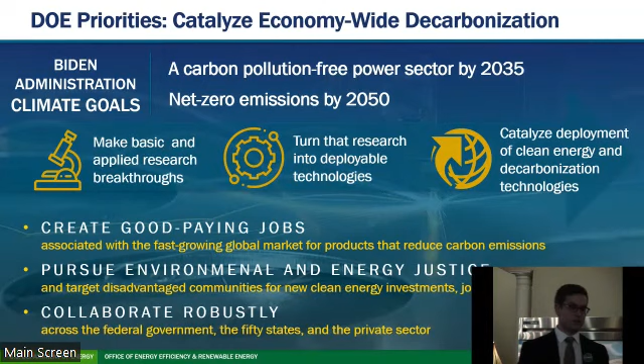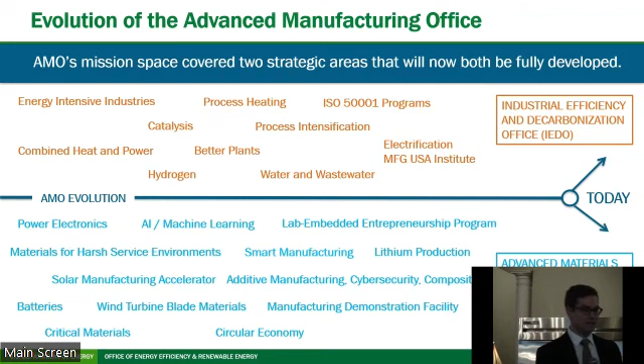Folks may or may not be familiar with the Advanced Manufacturing Office. If you're familiar with Better Plants, then the Advanced Manufacturing Office is where Better Plants lived for a long time. As of October last year, the Advanced Manufacturing Office took a hard look at the huge range of work we were doing and has evolved into now two offices. I'm here from the Industrial Efficiency and Decarbonization Office. Our sister office that split out of the Advanced Manufacturing Office is the Advanced Materials and Manufacturing Technologies Office, which looks at fundamental advancements in manufacturing to promote competitiveness of US manufacturers.

On the IEDO side, we're looking to increase energy efficiency in manufacturing, to drive energy productivity, to drive economic growth, and to promote decarbonization. Manufacturing is, of course, a major energy user, a major source of emissions in the United States and globally. So we invest in research and development efforts for technologies that will address those emissions and that energy use.

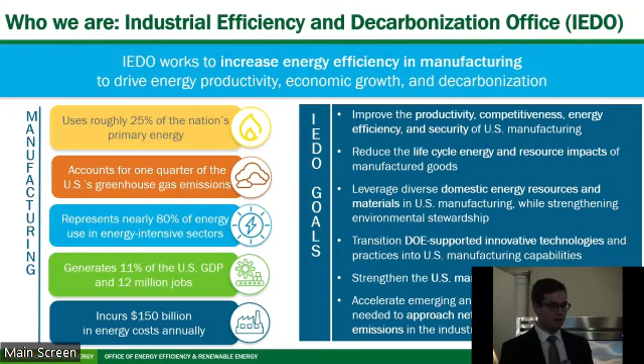I want to point to some of the things on the right here, some goals relevant to this pilot program we're working on: reducing life cycle energy and resource impacts of manufactured goods, providing training and strengthening the US manufacturing workforce, and accelerating the deployment of emerging transformative technologies that will reduce greenhouse gas emissions.

Within the program, there are several subprograms, several pillars. I'm going to touch a little bit later on the R&D efforts that our office works on. But this pilot program we're here to talk about today lives under the technical partnerships part of the office.

Technical partnerships works with partners in industry to help promote adoption of energy efficiency technologies and technologies that reduce greenhouse gas emissions. The main, maybe the banner program that you might be familiar with, is the Better Plants program.

The Industrial Assessment Center program, which is grayed out intentionally, lived within the Advanced Manufacturing Office for a long time. We still have strong connections there, but that has moved to a different part of the DOE organizational structure. We're always happy to help connect folks there.

It works primarily with small and medium-sized manufacturers. We also have the 50001 Ready program, which helps promote the 50001 standard, and CHP technical assistance partnerships. The tech assistance program really works on producing a lot of different tools and software that are provided to manufacturers free of charge to help them reduce their energy use and adopt best practices.

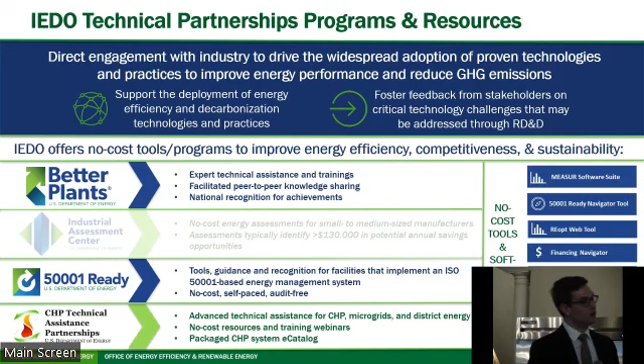Over the course of all of these programs, something we found is that the program has had trouble engaging with energy intensive industries. These are the parts of the manufacturing sector using the most energy and producing the most emissions, but we've had trouble engaging with them in existing programs like Better Plants. Going forward, we're really interested in understanding the challenges faced by energy intensive industries and helping them address those challenges.

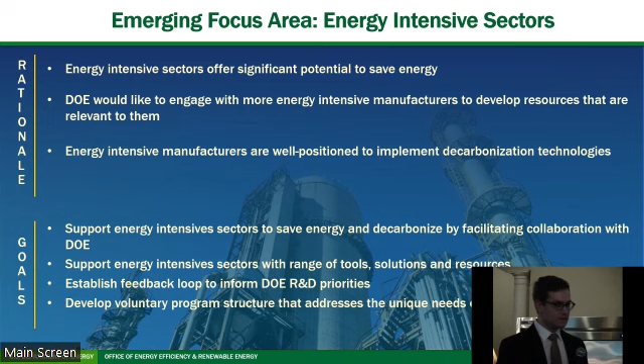So that is what this pilot is all about. We want to understand the technical assistance needs for energy intensive sectors and to find the right structure of a program that could meet those needs.

Starting out, what we've been looking at is working with a cohort of energy intensive manufacturers to work through ideas for what kind of support would be valuable. We have some initial ideas, but we're also open to new ideas, just trying to create this feedback loop to understand how we can be most helpful.

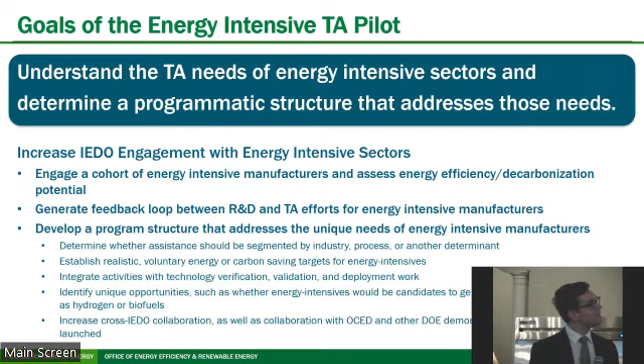So what I'm going to do now is hand it over to Senthil, and he's going to go through what kinds of programmatic offerings we have available now, to see if that catches anyone's eye.

Thank you, Zach. I don't think I need a mic, but I'm pretty loud, bear with me here. As Zach mentioned, this pilot initiative is all about you guys. We want to get your honest feedback, your honest opinion on what you think about these technical assistance offerings.

It's not just about giving you guys a questionnaire and getting your feedback, although we do have questionnaires, by the way, that we want you to fill out and give your honest opinion on. But it doesn't stop with that. We also want you to take advantage of our technical assistance activities, through which we want your honest feedback.

Our technical assistance activities include energy and decarbonization assessments. We try to put this into three buckets: energy and decarbonization assessments, comprehensive in-plant trainings on energy systems, and technology demonstration activities. I'm going to expand on these more in the coming slides.

But bottom line is we want to understand the ground reality of what some of the operational challenges are that you, as energy intensives, are facing from an energy efficiency and decarbonization perspective.

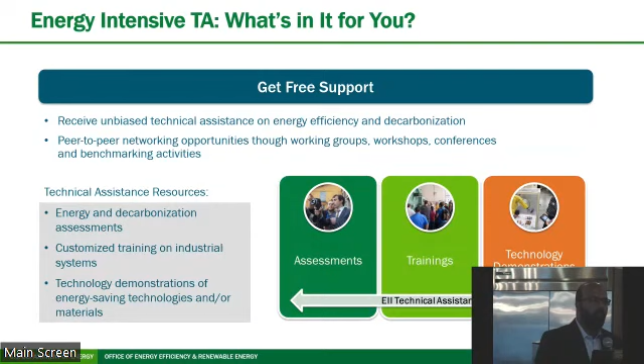There is no commitment or goal for this, it's completely voluntary. You receive, and we are not vendors trying to sell you anything. We provide you with unbiased technical assistance. So think of this more as a mutual agreement where we are trying to learn from each other.

As Zach mentioned, we have a flagship program that has been successful for the past 12, 13 years, which we call the Better Plants program. The Better Plants program has close to 270 plus manufacturing partners who work with us. But for some reason or the other, we were not able to attract the energy intensives to the program.

We do have quite a few energy intensives in the program, but we do not have the whole spectrum there. The reasons could be several, and that is what we want to understand.

It could be because the Better Plants program requires a commitment, and there is a goal of 25% reduction in energy intensity over a certain period of time. Maybe that is too ambitious for you guys. So that is what we are trying to understand - what would be the realistic goal? How much energy intensity can you guys really reduce, or what carbon reduction can you achieve over the years? That's what we want to understand.

We want you guys to take advantage of all the technical assistance activities, try it out. Let us know what works, what doesn't work, what makes sense, and which of these resources are more impactful for your cases. I have to tell you, we might not have all the solutions that you guys are looking for through these programs, and that is fine. That is what we are trying to get from this initiative or pilot period - we want to understand what more resources we can develop that are specifically focused for energy intensive industries.

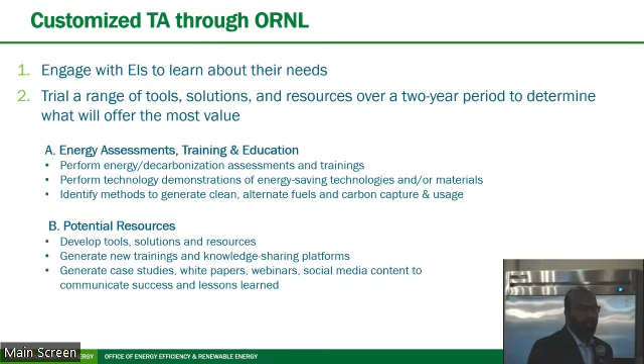You can request technical assistance through our website, which Zach will be sharing at the end. Depending on the type of technical assistance you ask for, we'll be deploying subject matter experts to your facilities. These SMEs have 30 plus years of experience in their particular field, so they can do industrial system assessments, compressed air assessments, process heating, steam system, and process cooling system assessments.

They can also do decarbonization assessments, focusing on alternative technologies and energy resources. And they can work with you on any process improvement or productivity enhancement assessments.

Lastly, for CHP, we have a technical assistance partnership with the CHP TAPs. Right now they are expanding to have much more capability than just CHP - they're now calling themselves on-site generation assistants, which includes fuel cells, on-site storage, and stuff like that. So they can help you do a feasibility study on whether CHP or any on-site generation technology works for your facilities, and they can also provide engineering support.

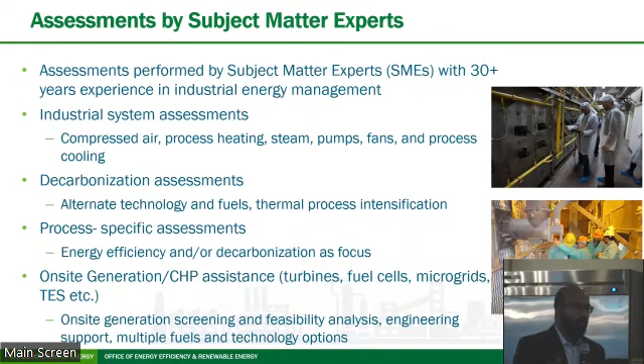Our subject matter experts are equipped with not only doing energy assessments, but also non-energy assessments, focusing on water efficiency improvement and waste reduction activities. And not only that, they are also equipped to do a plant-wide assessment.

Say if you do not want to just focus on one particular system, but you want to look at all the systems - as Zach mentioned, we have a partnership with industrial assessment centers who can do plant-wide assessments, who can look at multiple systems in your facilities and come up with opportunities.

They do have limitations - the IACs are equipped to do audits only for small and medium-sized facilities. So if you guys have any small and medium-sized facilities, you can take advantage of these assessments. These IAC centers are located out of universities, which are strategically located across the US.

Nice thing about this is, this year they have the capability to provide implementation grants - they have access to implementation grants. So let's say if they come into your facility and do an energy audit and give you a bunch of recommendations, and if you implement those recommendations, you can take advantage of the grants that are available through the program.

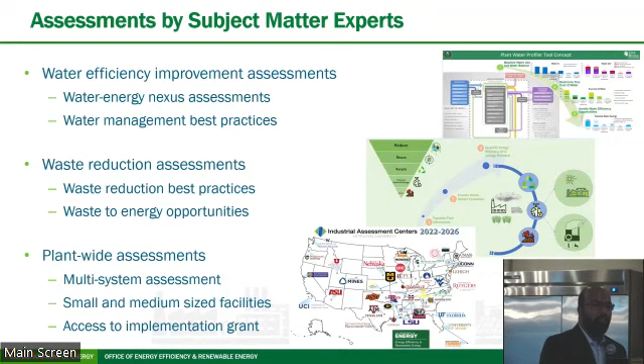Over the years, we have developed a bunch of tools - so many tools, and if I start talking about all of them, you'll be bored to death. But some of the important tools here is obviously the energy system optimization tool, which we call MEASUR, the Manufacturing Energy Assessment Software for Utility Reduction, which is a one-stop shop for energy system optimization. It has inbuilt modules - compressed air module, motor systems, fans, process heating, steam, you name it, we have everything there. And it has more than 60 plus calculators to do what-if analysis.

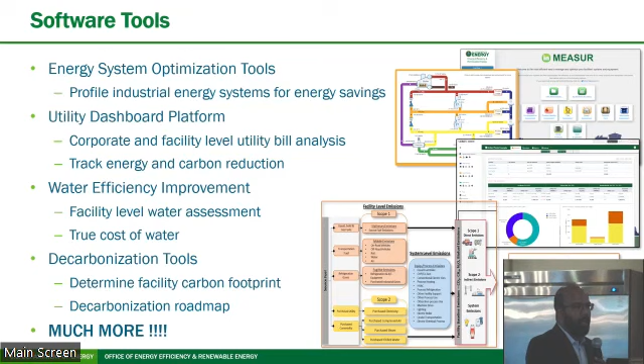And quantify your energy and carbon reductions. We have a utility dashboard platform that takes your utility bills and comes up with opportunities for cost reduction and water efficiency tools. Decarbonization is taking a front seat these days, so we're developing a lot of decarbonization tools that can quantify your scope 1 and 2 emissions and help you develop a roadmap for future years. We have a lot more tools available, and Zach will flash a QR code at the end that takes you through the website where you can look at all the other tools we have.

From a workforce development perspective, as participants in this pilot initiative, you'll have an opportunity to host in-plant trainings. These are a nice way to train your workforce, because we deploy a subject matter expert to your facility who spends 2-3 days training your plant personnel.

You can invite multiple personnel from different facilities to one facility and have a subject matter expert walk them through an assessment, show how to do it, use the diagnostic equipment, and how to use some of these software tools to quantify energy and carbon reduction opportunities. Some of the in-plant training topics we've done over the years include energy systems, compressed air, motors, process heating, steam, industrial refrigeration, water efficiency, and strategic energy management.

The other workforce development activity we have is a treasure hunt. We can facilitate these, the only difference being the facility personnel do most of the heavy lifting, right? We're there just to facilitate. They have a cross-functional team brainstorming ideas, the facility personnel split into groups, go look into opportunities, and then we help them use the instruments and quantify some of the opportunities they've identified during the walkthroughs.

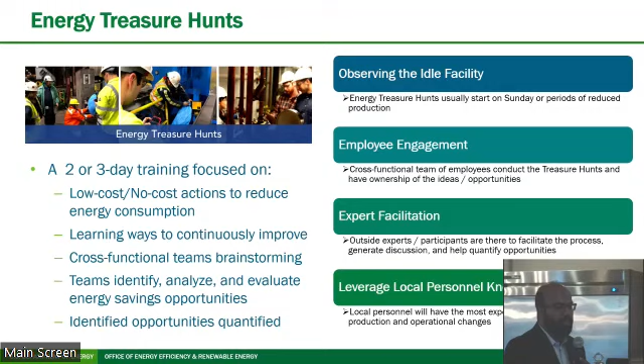The last piece is that DOE has almost 17 national labs across the US, so every year we host a technology day at each one of these labs. You get an opportunity to tour the state-of-the-art facilities and also get a first-hand demonstration of new and emerging technologies from industry experts and vendors who showcase their products, like carbon capture or electrification, and so on.

And obviously the last piece is supporting more R&D efforts, collaborating with DOE for more research, development, and demonstration. Zach will talk more on that.

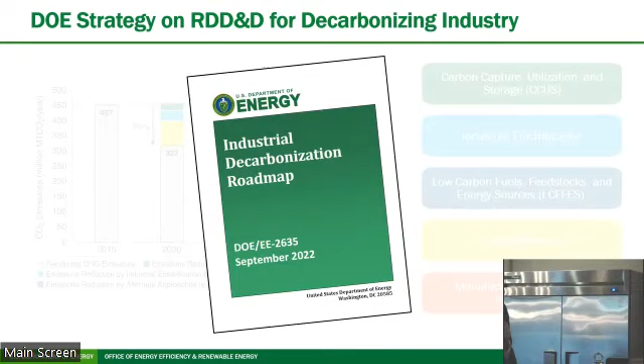I think I'll hand it over to Zach. Thank you. Yeah, so before we wrap up, I'm just going to very quickly touch on some of the R&D work happening at DOE and in IEDO specifically, because that's a huge thrust of what our office does and might be of interest to folks.

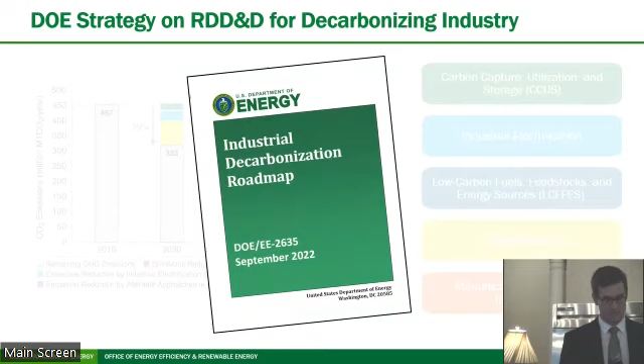DOE's strategy on energy efficiency and decarbonization of industry is outlined by the industrial decarbonization roadmap published last year. We think about our approach to decarbonization through several pillars: carbon capture, utilization and storage; electrification technologies; the adoption of low carbon fuels, feedstocks, and energy sources; energy efficiency measures; and fundamental manufacturing technology innovations.

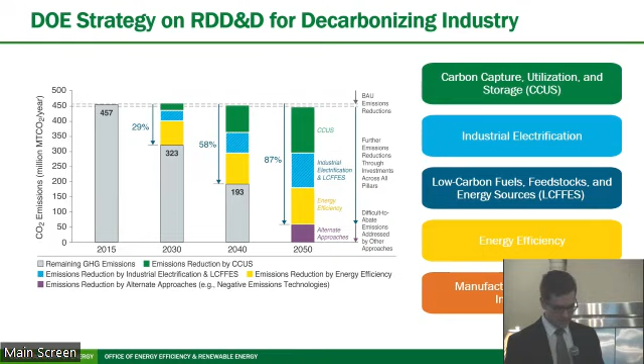At IEDO, we work in the space of research and development and pilot scale demonstrations, kind of first-of-a-kind demonstrations, and on the technical assistance end, and we work across all of those different pillars of decarbonization.

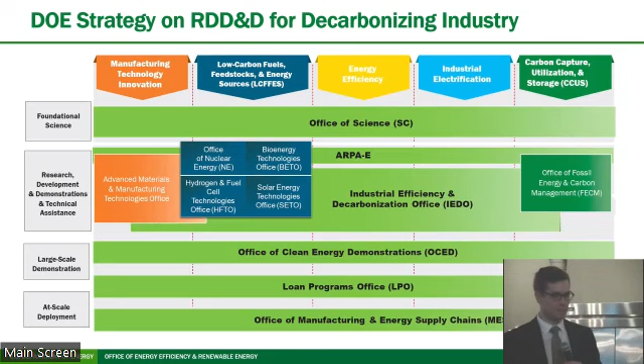We take a strategy in our office, both focused on specific subsectors and industries that are significant energy users, and also thinking about cross-sectoral approaches for equipment and other technologies that can apply in a number of industries.

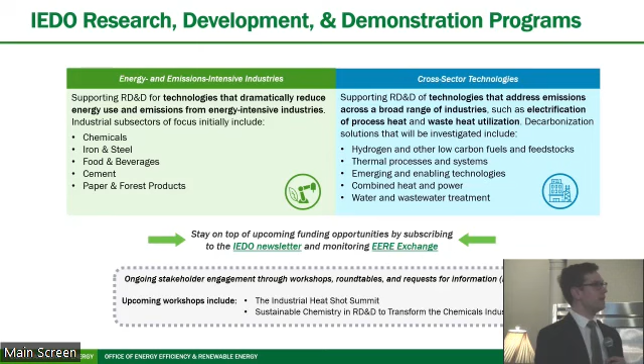So the big money news that's out there, when you get a copy of the slides you can click on those links, or go to our website to find out about them. We have the notice of intent linked there, but the full funding opportunity just got posted yesterday. IEDO has $156 million available for decarbonization and energy efficiency research in the industrial sector, and a $23 million announcement out for technical assistance partnerships.

And then in broader DOE, there's a very large funding opportunity available right now with the Office of Clean Energy Demonstrations. This is looking a little farther along in technology development and demonstration projects, again focused on the industrial sector. There's also tax credits available, which, I told someone earlier, I'm not a tax lawyer, so don't ask me specific questions about your taxes, but DOE is working on this.

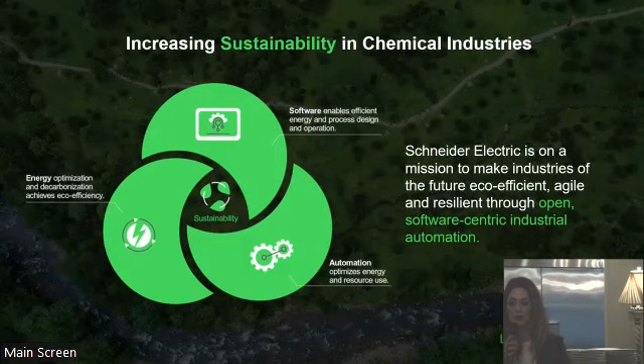Before we get into the decarbonization pathways and what we're doing at Schneider, we want to look at what's going on in the world. In the past few years, we've had the COVID-19 pandemic, the Ukraine and Russia war, disrupted supply chain issues, and an unpredictable economy. But one thing that remains constant is climate change.

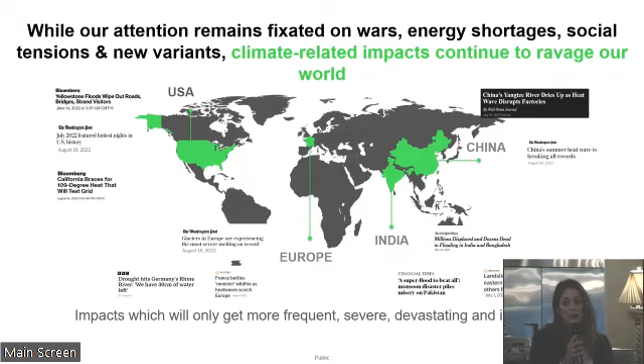We've had devastating events with flooding, droughts, hurricanes, and freezing temperatures in places that don't normally freeze. These events are really irreversible and devastating for people. So today we see a lot of pressure from stakeholders and from younger generations to decarbonize. But with the pressure high, we also understand there is a risk to access finance, and also risk to access talent. So how do we reach our net zero goals?

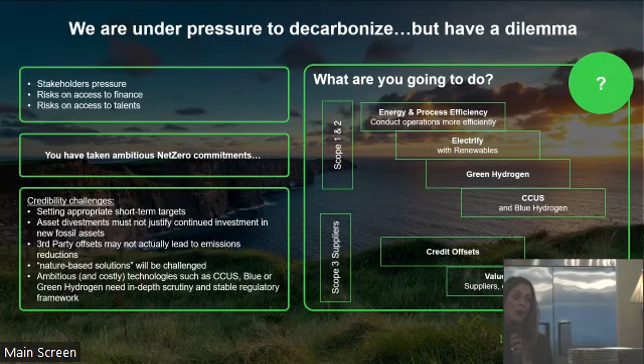We believe that you can reach your net zero goals by addressing low-hanging fruits — by that, I mean setting up short-term goals and long-term goals — and we need to continue to invest into technologies. When it comes to short-term goals, we can address decarbonization by 35%, lowering CO2 emissions just by applying our existing technologies. So that is really good news.

So we already have viable existing technologies that can reduce CO2 emissions by 35%. Some of the long-term goals, obviously, need a lot more investment and a lot more time. So we encourage our partners and customers to continue investing into the long-term goals. And as I mentioned, we need to continue to innovate and bring the technologies up to speed for producing green hydrogen, green ammonia, blue hydrogen, blue ammonia, or CCUS.

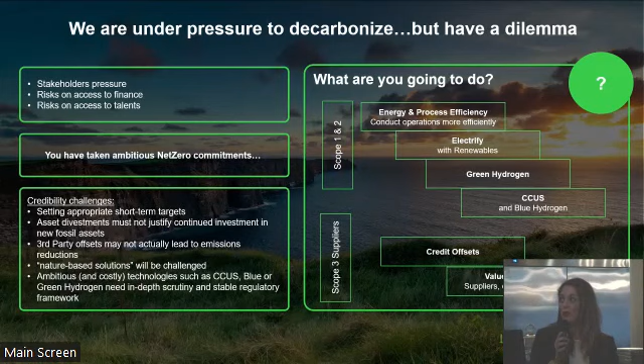So let's look at our numbers for CO2 emissions. These numbers are pretty high. These numbers came from 2021. 36.3 gigatons of CO2 emissions was a new record high in 2021 that came from the heavy industries. And we are on track, increasing our CO2 emissions by a 6% rate every year.

When it comes to heavy industries, 8.7 gigatons of CO2 emissions came from power generation. So when you think about the heavy industries and chemical industries, these companies really rely heavily on power and energy. It's one of the hardest industries to decarbonize because of their dependency on energy, and also because demand is very high, so they can't bring production down to address decarbonization. We have to run the plants and still find ways to decarbonize.

This is kind of shocking: 78% of the energy used in our industry is not electrified. This is actually really good news, because we have tremendous opportunity to electrify and use electrification as a way of decarbonization. Right now, about 80% of the energy in the industries is fuel-based. So really good news and opportunity to improve here.

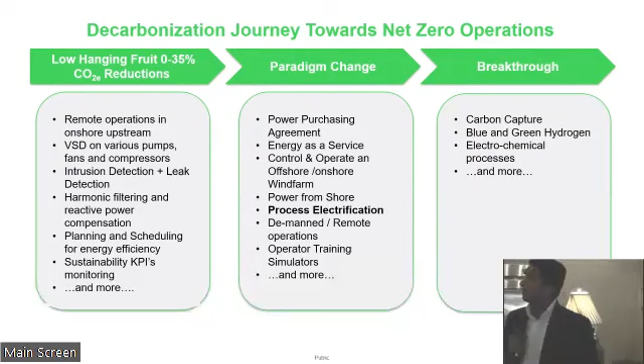When it comes to decarbonization, I'm of the view that all options are on the table. I'm not saying electrification is the only way to decarbonize. All options are on the table. Yasmin mentioned the low-hanging fruits.

If I look at the decarbonization roadmap, I will put that into three buckets maybe. The first one is the low-hanging fruits. These are the things which we can easily do in our plants, in our facilities with existing technologies, and can be done cheaper most of the times.

If you look at some of the things here, harmonic filtering is something we don't pay attention to most of the times, and also VFDs. There are many facilities still running with simple motor control systems, not with a VFD. So these are the things that need to be looked into.

Also optimization and planning software—correct implementation of that can bring the carbon footprint lower. Collectively, all these actions can bring down the carbon footprint by up to 35%. That's why we call it the low-hanging fruit.

Now, to push further, to get to the next level, we need some paradigm change. When I say paradigm change, we need to relook the way we design, build, and operate our plants. For example, we are running with fossil fuels for fired heaters and gas-driven compressors—can we look into a different option like electrification of those things? So process electrification squarely falls into this category of paradigm change.

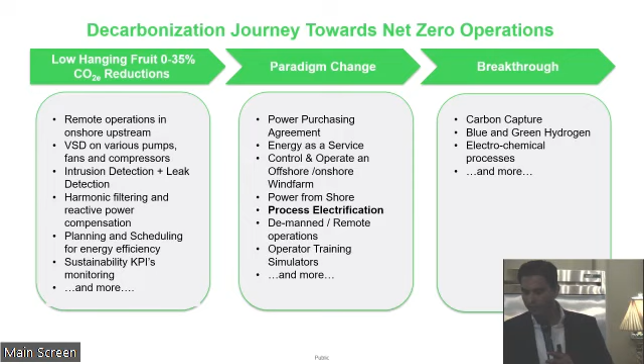CCUS, of course, is an option, but it also has a major capital investment. It works in some cases, it doesn't work in others. Especially if you have a hub concept, it has a better priority over electrification. But if you don't have a hub option, electrification might be a better option.

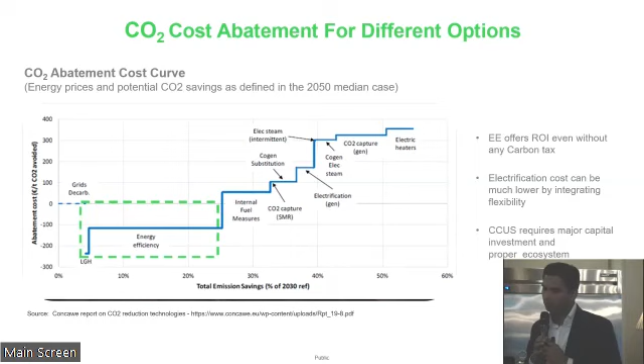Now let's look at how we build a decarbonization roadmap or an electrification roadmap for heavy industry. When I say electrification, that's a journey—it's not a step change. That journey happens between when you decide on your GHG reduction ambition and the moment you get to that target. So things happen in between.

It really starts with the assessment of the potential. When you think about an electrification project, you need to assess if it has the potential to achieve that goal. So you start with a pilot project—you need consulting and pre-studies, and approximate quantification of savings with respect to that electrification. Once you have that plan, you prioritize the things to be electrified.

Depending on your specific situation and processes, you will identify functions and units to be electrified. It could start with small heaters or small compressors and gradually move up to the large heaters and large compressor units in the plant.

In parallel, you also need to work on the power supply. This is very critical—I cannot jump into an electrification project without figuring out where my power supply is going to come from. So the green energy, the utility contract, and the hybrid generation model all need to be thought out in parallel.

And the final stage of this process, once you have already figured it out, you are in the decarbonization pathway with electrification, it's time to think about leveraging demand side flexibilities. When I say demand side flexibility, it's both ways. The flexibility in terms of fuels—can I switch between my fossil fuel fired heater and the electrified heater, or can I have a hybrid arrangement? It's also about the storage mechanisms, right, the battery energy storage or thermal storage system.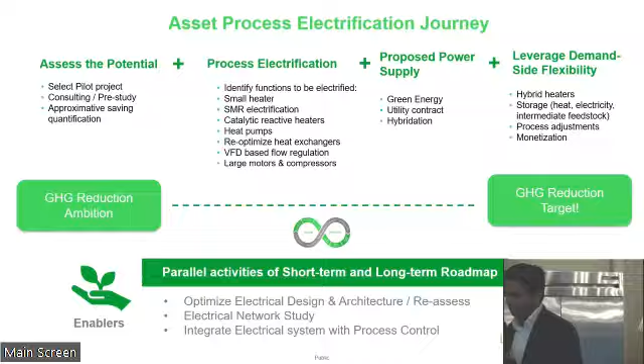Now, I will consider any major strategic changes like electrification needs to have a comprehensive approach, right? So in that comprehensive approach, at the minimum, I will consider these four elements. Do I have a decarbonization strategy in place? Did I look at the alternative options—carbon capture, all other things, hydrogen, green hydrogen, blue hydrogen? Did I look at all those options? Did somebody do a financial modeling of that to clearly say that electrification is the best path forward? So this is the first step to be done.

And then you need to assess that if I'm going ahead with electrification, do I have the power purchase agreements in place? Can I secure the green electricity? All those things need to be considered, right? The second element is, if you're going to be grid connected, do my grid have the capacity there? Do they have an energy management system that will support my flexibility goals, etc., right?

Just to give you an example, a major project that's going on in the Permian Basin is to electrify their compressor stations. So one major player, just one player in Permian, once they're done with their electrification project, they're going to consume 30% of the utility's capacity there. So that's the scale of projects we are talking about.

Now, most of the times we don't look into the power system, right? So today, 5% of your energy in a refinery is electric, right? Now, if tomorrow it's going to be 50% or 80% or even 100%, do you have a strategy to evolve your power system there? Is your power system, the basics of your power system, is it stable enough to upgrade to that level? That's a big question to answer.

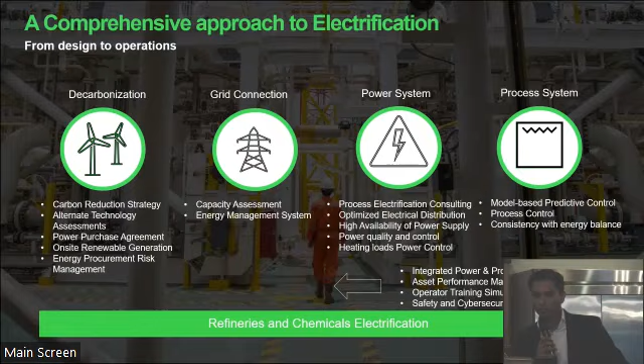Okay, so if I try to simply classify process electrification into 2 simple buckets, we are talking about either electrification of motion—that's your compressors, motors, and pumps—or electrification of your heat, okay, process heat. And that's a larger part, which has been talked about. 72% of the energy used in refining and chemicals is going to be in that bucket. And that's the toughest part, right?

Further, we can divide that into light processes or heavy processes. This is for the purpose of evaluating technical feasibilities. If it is a light process, as there is technology available, we can go through. But if it's a heavy process like crackers, electrifying, that is going to be a challenge. It's not impossible—we are engineers, we can solve anything—but the challenges are much higher there.

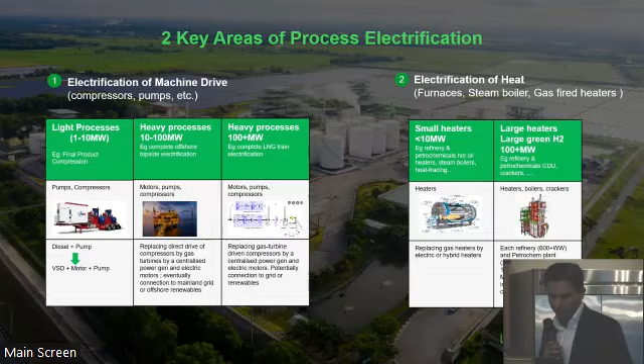And there was a talk, we are talking about electrification—is it just about GHG reduction? We're talking about the gas price versus electricity price being economic. We can do all kind of modeling. We have the tools, right? But electrification is not just about GHG.

It is also about driving higher efficiency. If you say electric motors are inherently more efficient, electric heating the same way. Now, when we consider the lower maintenance cost that happens with electric drives, for example, electric drives are 10 times MTBF, and if you look at MTTR, it's 10% lesser compared to gas turbines.

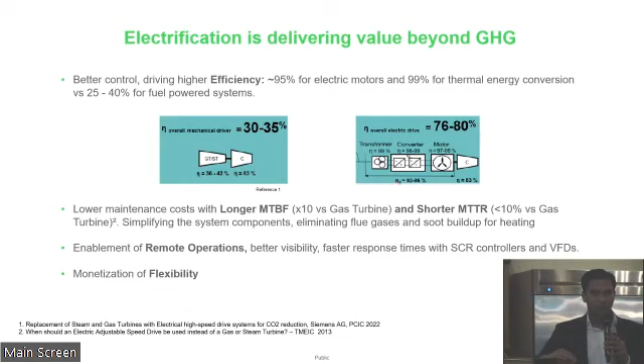Now, electrification also enables remote operations. It also enables you with better visibility and faster response time. That means theoretically, you need to have better process control there. You need to have better efficiency and yield coming out of electrified processes. And lastly, we talk about monetization of flexibility that will be part of the equation. So when you consider the benefit of electrification, we need to consider all these, not just the energy cost, not just the capex. Yeah?

Some of the challenges to look into when you start looking into electrification: very clearly, for any facility, major electrical infrastructure upgrades are required. This needs to be a very serious concern addressed as part of the strategy. And again, when you decide to go for electrification, make sure you have secured the green electrons required for that program.

Again, with high temperature electrical processes, controllability is a challenge depending on how you want to approach it. If you're talking about large heavy processes, you're talking about medium voltage heating, so the controllability of that process is a challenge again. And the scale of these electrification projects, when you're talking about cracker electrification, we are talking about hundreds of megawatts of electric system in place. So those are complex projects to handle.

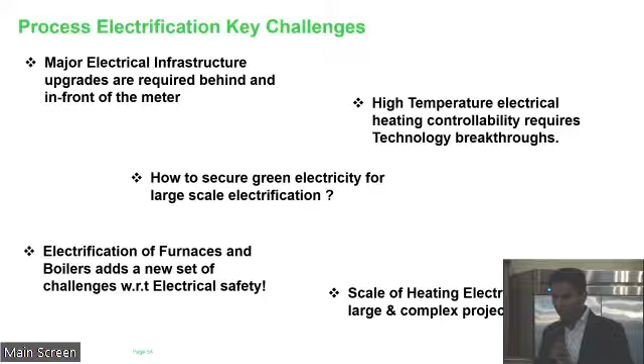I will summarize with this. If you're trying to achieve your objectives of decarbonization with process electrification and decide to embark on an electrification project, these 5 elements need to be part of your ROI when you measure it. Of course, your goal is net zero operations, so you need to make sure that project is going to be sustainable. Once I electrify my processes, is it going to be carbon neutral? Do I have enough green electricity like I talked about? So net zero operations and sustainability are going to be the key goal there.

They reduce total cost of ownership. So I am embarking on a large project - what's going to mean by total cost of ownership? Can I optimize the capex? What is going to be the equipment efficiencies? Can I improve the process with better control? Things like that.

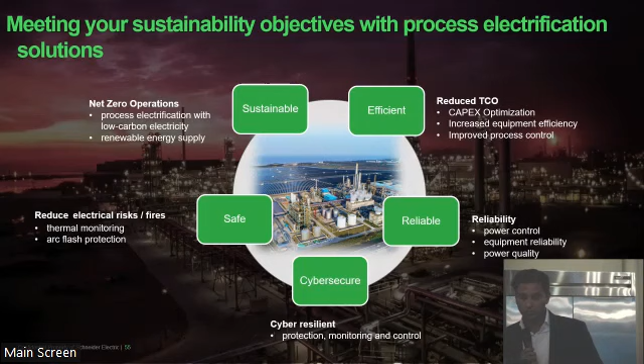Safety. This is a key parameter. We are all concerned about functional safety in our refineries and chemicals, but when I go to fully electrified operation, the electrical safety is going to be a major concern there. Then reliability of equipment, and finally the cybersecurity. So cybersecurity needs to be part of the equation as well.

Just one thing I'd like to highlight. I talked about process control here. This is your traditional process control system - you control the burners in a furnace and you control the flow of fuel. But in an electrified system, what are you going to control? You're going to control the flow of electrons to a heating element. So this is a major shift in the way control strategies are applied.

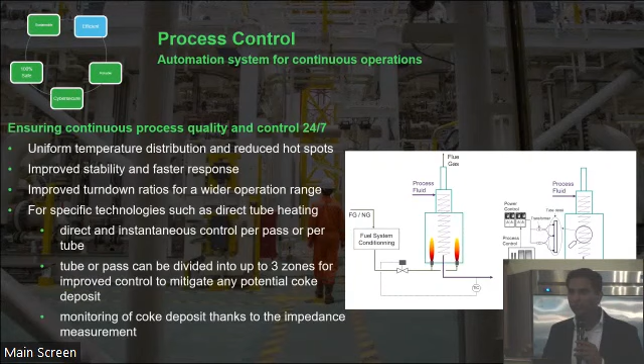Now, there needs to be some key development to make this possible. One technology I'd like to spotlight here is direct heating. This has the potential to replace fired heating processes. Direct heating means applying electricity directly to the metallic tubes in a furnace. We talked about some safety challenges, but specifically the one we are working on has the potential to operate at safety voltages less than 50 volts, and can achieve up to 1200 degrees Celsius of heat. And this is suitable to retrofit existing furnaces - that's a key thing. If you're coming out with a technology that is not feasible to retrofit existing facilities, that's not very useful. So this technology has the potential to retrofit existing furnaces.

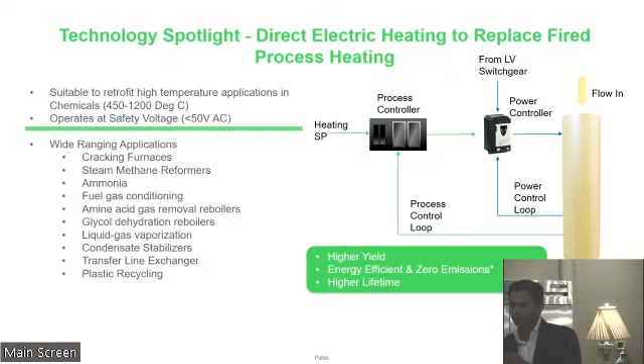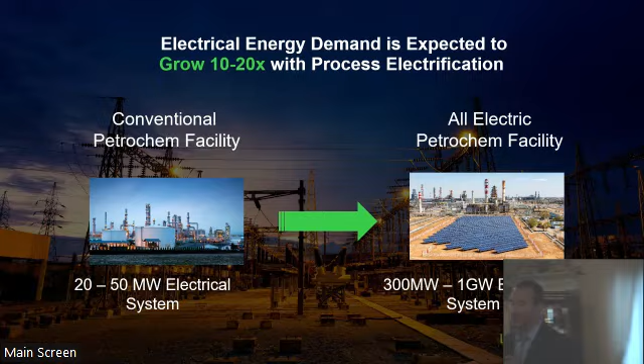Okay, so for online, the question was, what would be the main fuel to generate all the electricity? There are pathways to get there, right? We're talking about a gigawatt-scale electric system—you have multiple pathways to get there. Either through power procurement or a power purchase agreement, where you collect all the green electricity available in the Texas grid and bring it to your use, or you combine technologies like a virtual power plant, microgrids, energy storage, thermal storage—all combined together—to bring your own grid system. So there are multiple ways to get there.

Preferably it has to come from a green source. Wind, solar—those are good options. But we're also considering, as part of the industrial microgrid—I don't want to call it a microgrid anymore, when you're talking about a gigawatt-scale system, that's not a microgrid, it's a mega grid—technologies like SMR, in this case not steam methane reforming but small modular reactor, as an option to be integrated as part of the grid system. This should give you an idea of how a future standalone grid system's generation is going to come from: mixed renewables plus SMR plus thermal storage, all combined.

All right, one more question. Well, I was going to suggest that the only way we're going to do this is through nuclear small modular reactors, so you stole my thunder.

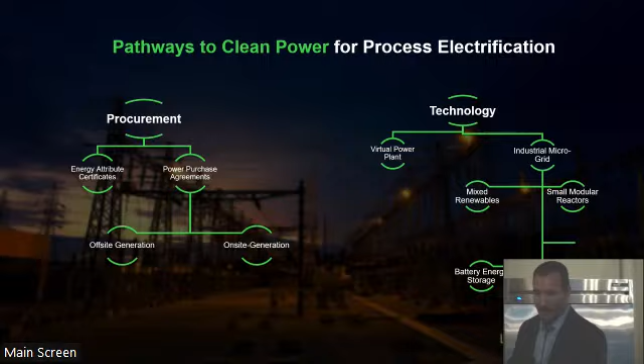All right, Alan, are we stopping the recording?